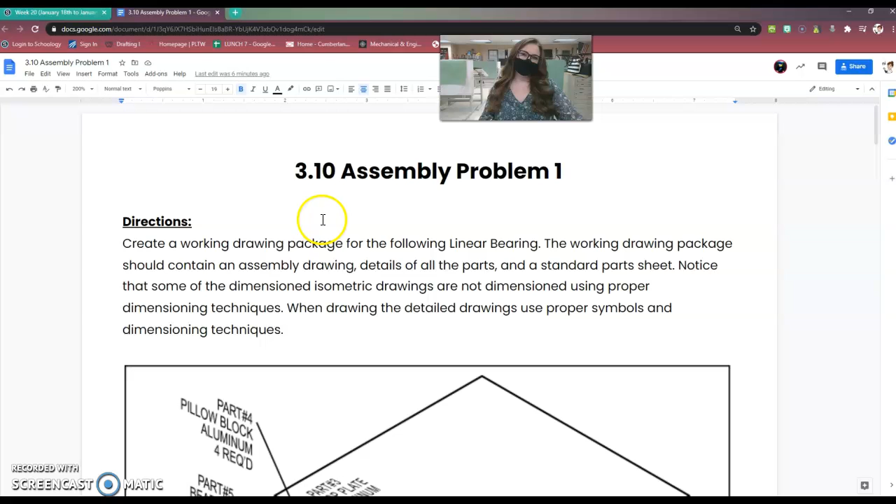So, looking at this week, it looks like a lot. You have 5 drawings. Now, these drawings are super simple. If we click on this, this is where you're going to locate all of the drawings themselves and individually their dimensions. So, click on that. It'll open up the document and you can click on the link to make it bigger, which is what I've done. Basically, you're going to be creating the drawings that this worksheet gives you, and you're going to be working towards assembling them. And this is what it will look like when it's all said and done and assembled.

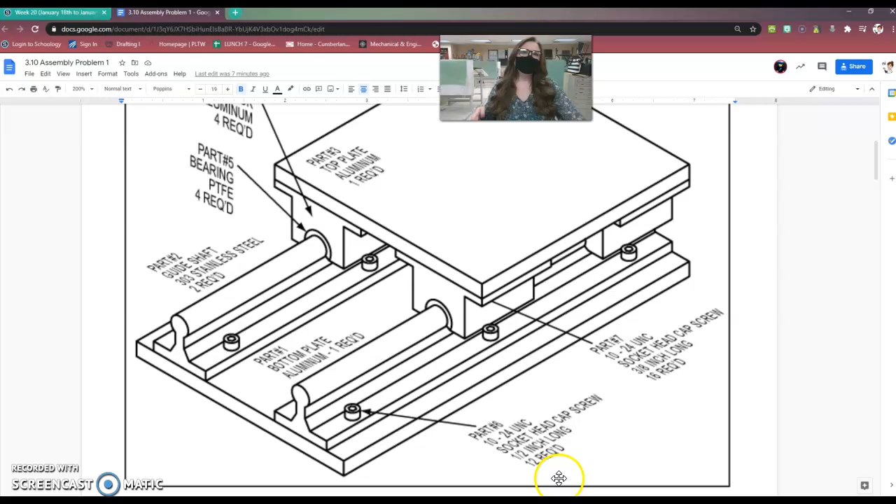So there are 5 drawings I have for you this week, but if you look at this assembly drawing, there are actually 7 parts. Part 6 is a socket head cap screw, and it says how long it is, and it gives you all the information that you need. So I will show you how to do part 6 and part 7, but I want you to focus on parts 1 through 5. So here is, for example, the bottom plate, part 1.

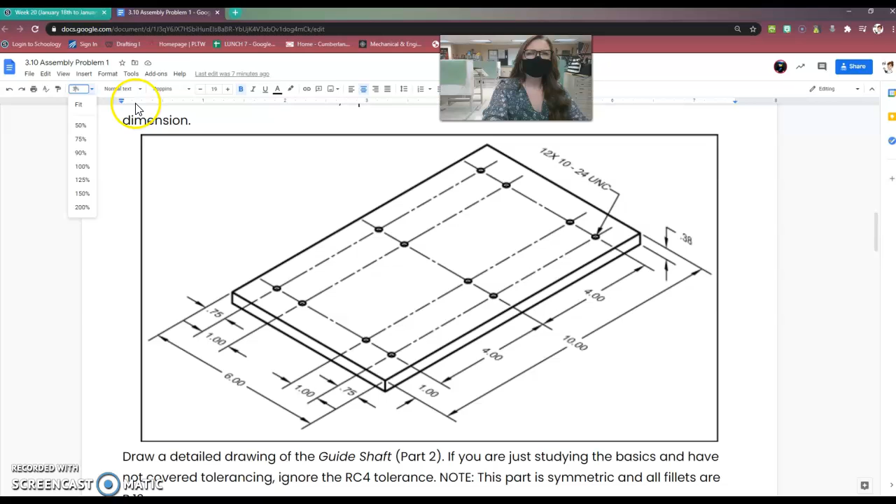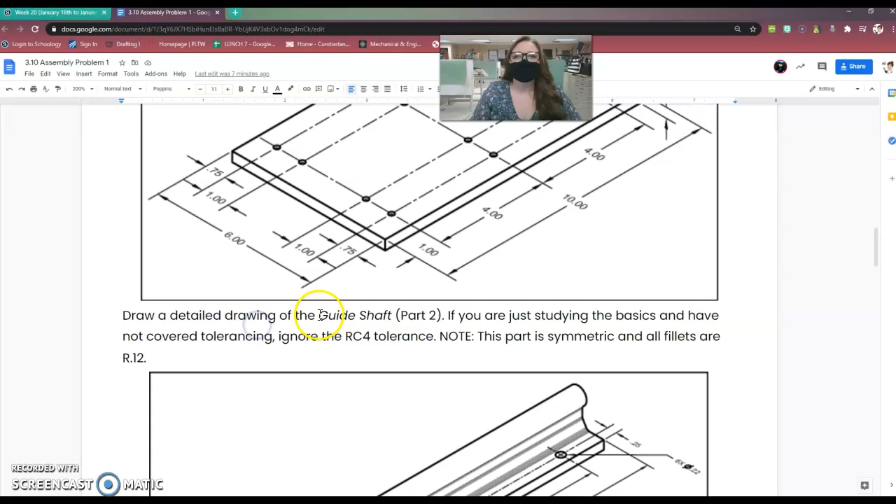That's all it is. You need to zoom in to see the dimensions even more. Obviously, you can. I don't know if it's going to let me. It's not gonna let me. Anyway, you can probably zoom in more on your computer at home, but you can see it gives you all the dimensions, and then some information right here for you. And then moving on to the guide shaft part 2, here that is, and you can keep drawing as you go on. Again, as you finish, I do have individual turn-ins for those pieces.

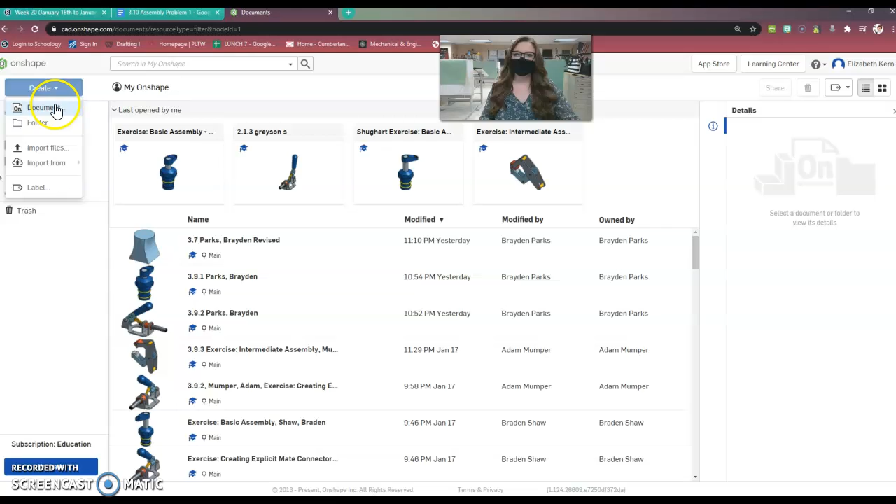When working in Onshape, here's the deal. I recommend that you create all these drawings in one file. You can import files into each other to do assemblies. It just gets a little messy and becomes a little challenging. But when you go to create, you can hit document, and then you can label this 3.10. I'll just label it 3.10 for right now. I can always change the name later. Not a big deal.

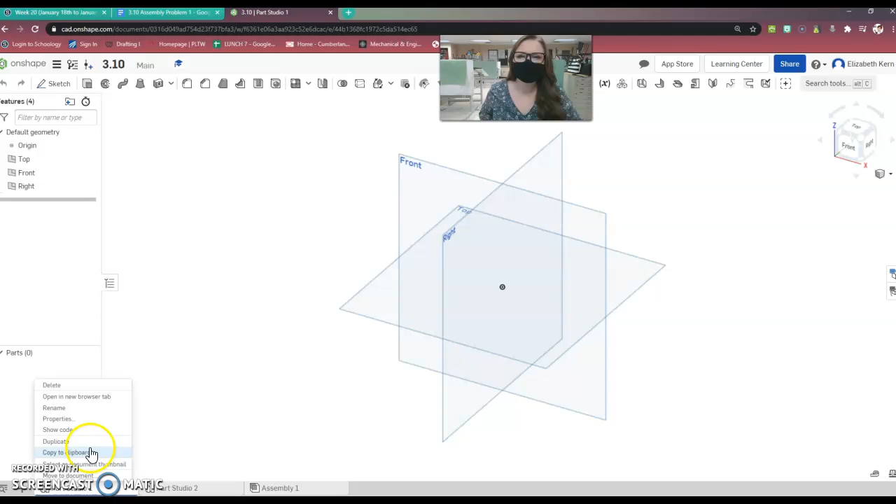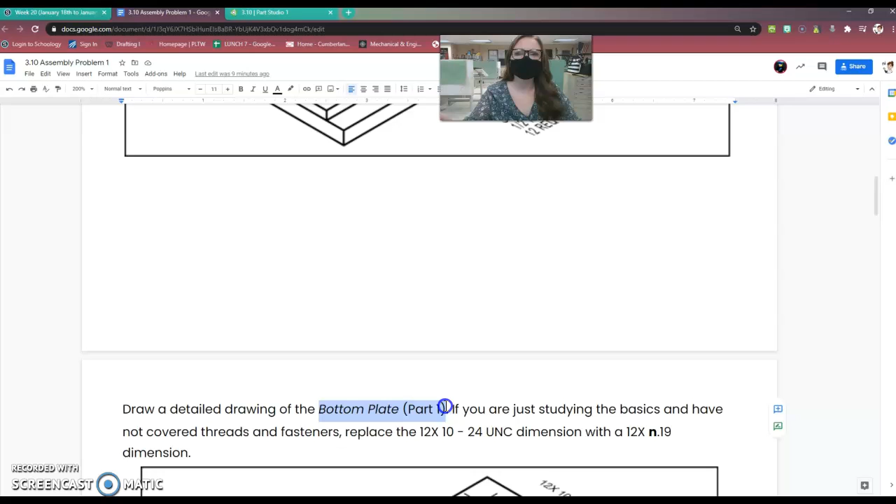But down here in Part Studio, you can see Part Studio 1. I can click on this, and I can hit rename. And I can also add another part. Where is it? Create Part Studio. So now I have 2. So I'm going to rename this to my first piece called Bottom Plate, Part 1. That's where my bottom plate's going to go.

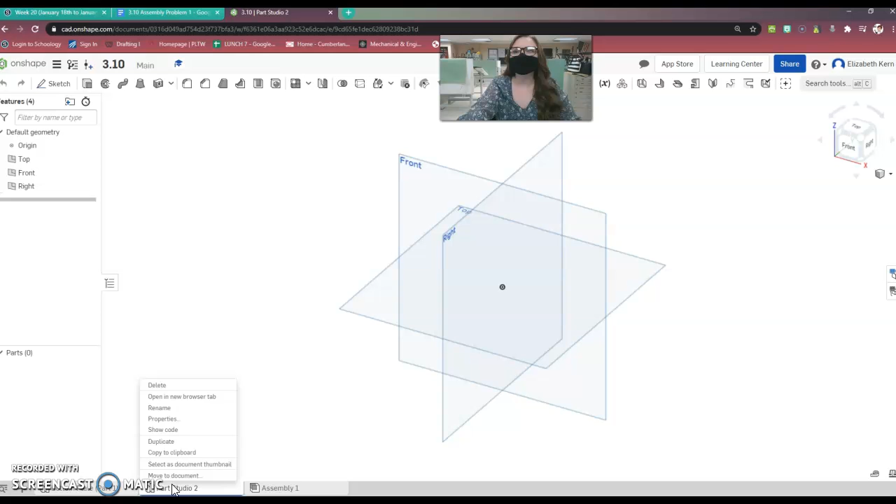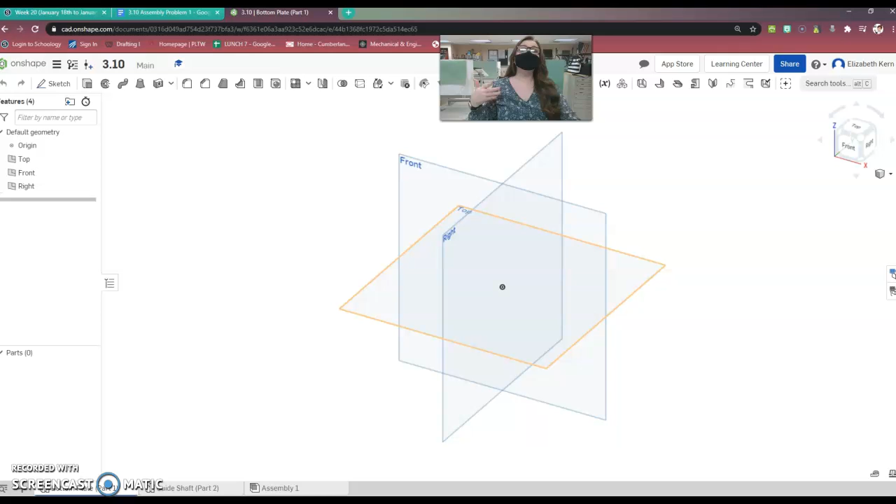Then the next tab, I can go and see what my next drawing is. Guide shaft Part 2. So I can create all of my drawings in the same file, just under different tabs. And that's what I want you to do for this assignment. You'll have at least 5 and then probably 6 and 7 by the time we go to assemble it. So again, as you're drawing them, you can share them with me individually, and I want you to take a screenshot of them. I want you to create their drawing, because you should be able to, from the Part Studio.

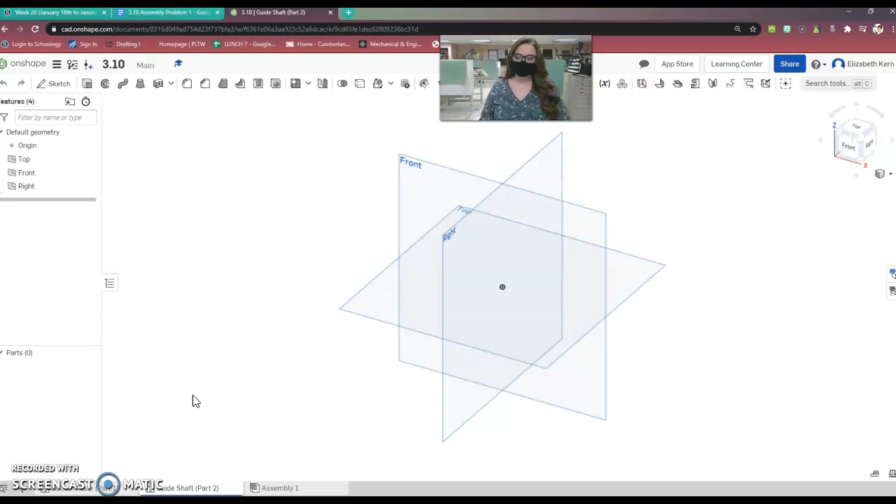Anyway, you'll draw it, create drawing, submit that, share with me, and move on to your next one. You know what? Scratch that. Just create the parts. I'll know when we go to assemble it if they are done correctly or not. So I'm not going to make you do the technical sketch for them. We will be doing a technical sketch for the assembly portion, so don't worry about doing the technical sketch. Just create all of your parts in Onshape. Give me an isometric view. Take a screenshot. Submit that screenshot into the corresponding part. Make sure you get it into the right part. And then you can stop there.

All right. So that is what I want you to do this week. Again, this is the end of the marking period. So all of these assignments will be on 3rd marking period. So anything that you might owe me for 2nd, you have until Friday to get it done. So focus on that for right now.